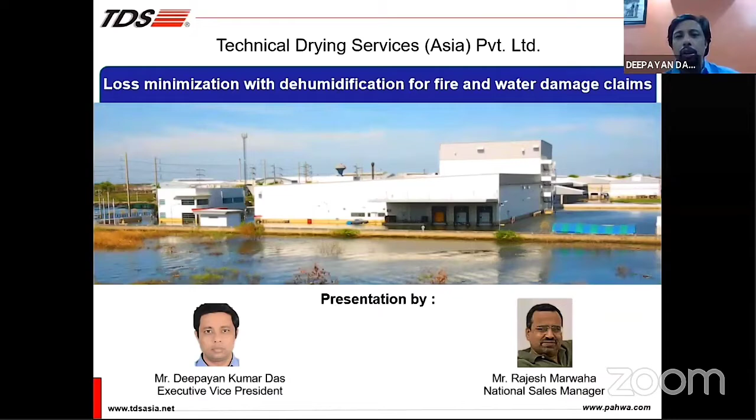So with this, let me start the presentation. Today, our presentation is going to cover the following things: an introduction of the Pahwa Group. We'll talk about what is water damage restoration, its impact, basic types of damages, so on and so forth. We'll also dwell a bit on the science of drying.

What is restoration drying? Advantages of restoration drying. What can be restored? What cannot be restored? Some case studies, question and answers. And finally, we'll talk about TDS, Technical Drying Services, own credentials in being in this field.

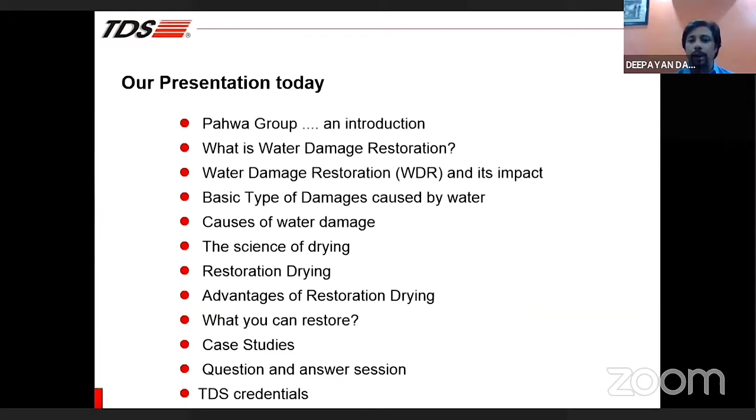So to start with, the Pahwa Group is basically almost a 55-year-old company operating out of India. We have got four companies.

Dry-Air is one of the companies, DRI, Delair, Technical Drying Services, and we also have another company in Switzerland called Dry-Air Prokon. So three of our businesses, Dry-Air, DRI, Delair, are manufacturing, and TDS is the marketing and services company.

We have a worldwide network covering India, Malaysia, China, Switzerland, Brazil, Philippines, Korea, Bangladesh, UAE, Nigeria, and the USA. These are locations where we have our own offices and factories as well.

We have 11 manufacturing plants, 7 in India, 1 in Malaysia, 1 in China, Switzerland, Brazil. And when you talk about our resources, we are more than 1,500 plus employees, out of which almost more than 50% are either engineers or technicians.

We have a very strong backbone of research and development facilities, which is registered and recognized by the Ministry of Science and Technology, with 8 in-house research and development and test labs.

We are proud to say that, as an Indian company, we have filed 123 international patent applications till date, covering 13 different new technologies, out of which 43 patents have already been granted or allowed.

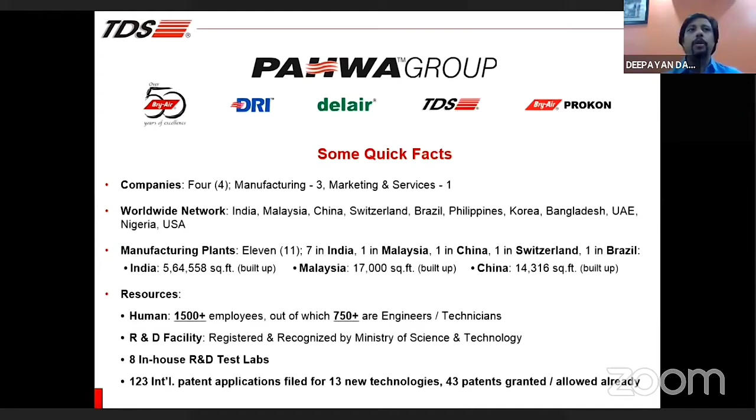Now we start with the presentation, and the first question that we would like to dwell upon is, what is water damage restoration? Now this is something which is very relevant today. And why it has become more relevant in the recent years is something which we'll see shortly.

But let us understand, what exactly is water damage restoration. Now, water damage restoration, let us first understand, is an emergency service.

Like you have got a fire service, which is an emergency service. A medical team is required on an emergency basis. Similarly, a water damage restoration team is also an emergency service.

Basically, the objective is to dry and restore assets that are damaged by water. So we say that our objective is to preserve, protect, and secure the assets from any further damage, and to recover and restore the material to its original functionality.

Now we say we want to recover and restore the material to its original functionality. That does not mean that all the materials we restore, all the equipments or components that we restore, will become like the original in terms of look and feel as well.

So our objective entirely is to first of all work on the functionality of the asset, and to ensure that the asset owner is able to derive the necessary functionality from the asset.

Now you would notice here that we are talking about preserving, protecting, and securing before recover and restore. That is because as you go on through the presentation, you would realize that water damage is something where we

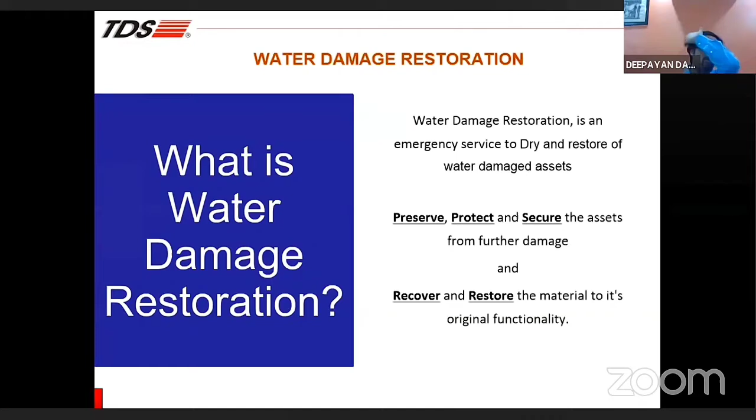Now, why is water damage restoration so important? Water damage restoration is so important because it is one of the chief causes of loss that occurs in a country which is related to natural disaster.

Just to give you some statistics, 2005 Mumbai floods, almost about 3,000 crore of loss was reported. 2008 Bihar floods, almost 2,000 crore of loss was reported.

And when you talk about the latest one, which happened in Kerala in the year 2018, we are looking at a loss of something close to about 40,000 crore, which was reported. If we look into the situation worldwide, we will see that the damage is much bigger.

For example, if you see 2017 Hurricane Harvey, which hit Texas and Louisiana, the loss reported was something close to about $90 billion US. Hurricane Maria, which hit in 2017, the loss reported was $102 billion.

Now, most of this loss has to do with water, which comes in and damages households, damages industries, damages office equipment, vehicles are damaged, raw materials are damaged, finished goods are damaged, so the loss becomes huge.

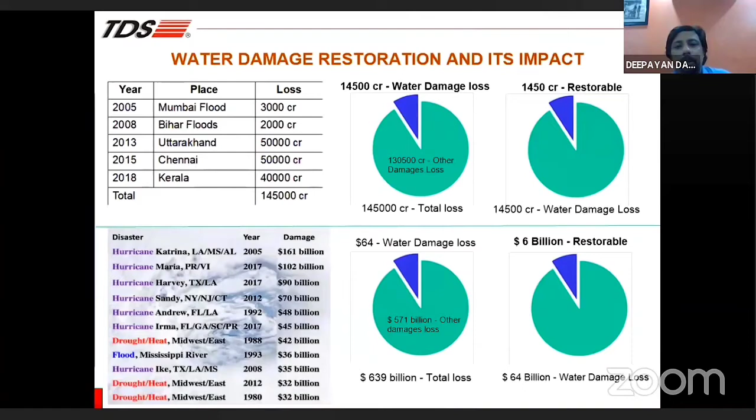Now, water-related damages. If we look into water-related damages, we can actually classify them into three clear categories. As we all know, if there is a damage which is happening, it is very essential that water must have come inside. So one type of damage is called the clean water damage.

Now what is a clean water damage? This is typically a pipe bursting, overflowing from sinks, which can happen at our home. There can be rainwater which enters, or it can even be a fire incident wherein the fire engine must have come and doused the flames with clean water. Now the point to be noted about clean water damage is that it only wets the surface. It does not cause much more damage than that of wetting the surface.

But if a clean water damage is not taken care of within 24 hours, it can actually turn into the next stage, which is called a gray water damage. A gray water damage typically happens when there is an equipment discharge, or some kind of chemical discharge, or rainwater moving through unclean sources. These are typically more dangerous than clean water damage because they increase the rate of corrosion significantly.

They cause a lot of other damages in the system. They are a potential for infection. They can cause other kinds of contamination, so on and so forth. We also have to understand that if a clean water damage is not restored within 24 hours, or we do not start working on it within 24 hours, the water will start becoming gray water, and the damages would be something what you would expect in a gray water damage.

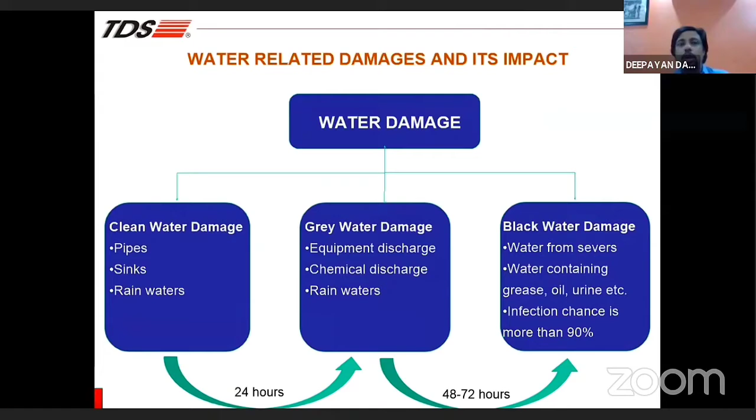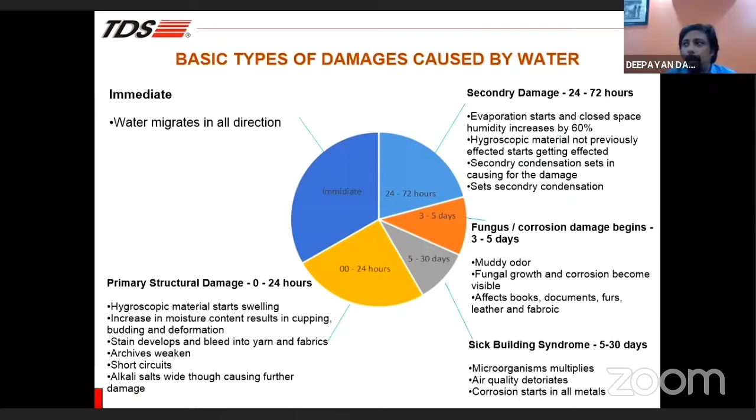Now when you talk about the damages caused due to water, we see that, as I told you earlier, we are fighting against time. And what we have tried to do here is give you an idea of how water damage actually proceeds through an area which has been damaged. Now when you look into the causes of water damage, there can be many. One is heavy rainfall, hurricanes, or floods, which are typically natural damages.

Broken water pipes inside the building, basically plumbing faults, are the second biggest cause of water damage. Fire control procedures, which involve substantial quantities of water during firefighting, also cause damage.

The problem with firefighting is that whatever damage the fire causes, the water sprayed to control the fire causes much bigger damage. So there are cases where the shop, godown, or building that caught fire has damage from the fire, but places around it also get damaged because of the huge amount of water. For those affected by the water, it's secondary damage. They want to get their facility back into action quickly, but because of the secondary damage, they also tend to incur business losses compared to the ones affected by the fire itself.

Defective and damaged sprinklers in commercial buildings are one more problem area, mainly with offices. Today, when you look at call centers and business processing centers, this can be a big challenge because it can put them out of business for a significant amount of time. So let's say a call center goes out of business for 3 hours in a day because of a water sprinkler - that's a significant loss in terms of the revenue they can generate.

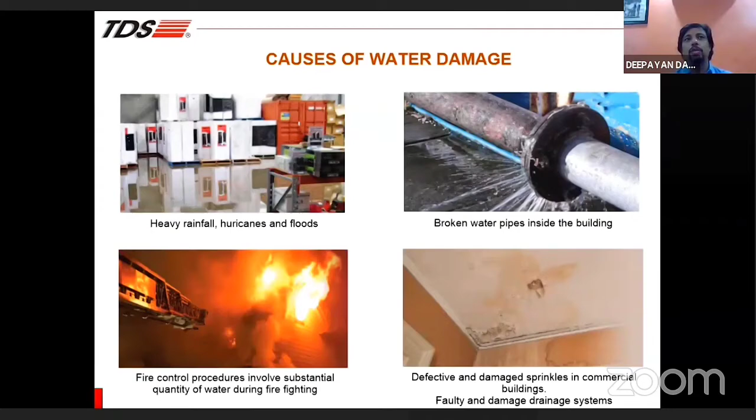Now, to go further, we have to understand drying. We all know drying - we wash our clothes, we dry our hair, we mop our floor and it gets dried. But not everybody thinks about what exactly is happening, or the mechanism happening in the drying process. The drying process is a technology. Although we may not easily understand it, it's a technology.

The definition of drying is a mass transfer process consisting of removal of water or any other solvent by evaporation from a solid, semi-solid, or liquid. So whenever you encounter the word drying, you have to understand that this is a physiochemical process happening, with strong technology behind it.

Basically what we are talking about is that there is moisture and there is a heat transfer happening. As a result of the heat transfer, the moisture is forced out of the system, and then we have a gas, and this gas is responsible for moving the moisture from the area.

The yellow colored lines that you see are the moisture, and the blue line is the dry air. As the dry air comes in, it pushes out the water molecules. If we do not maintain a particular velocity of the gas, the water molecules will start saturating, and then no more drying happens. So you need to give a velocity of air to move out the water molecules.

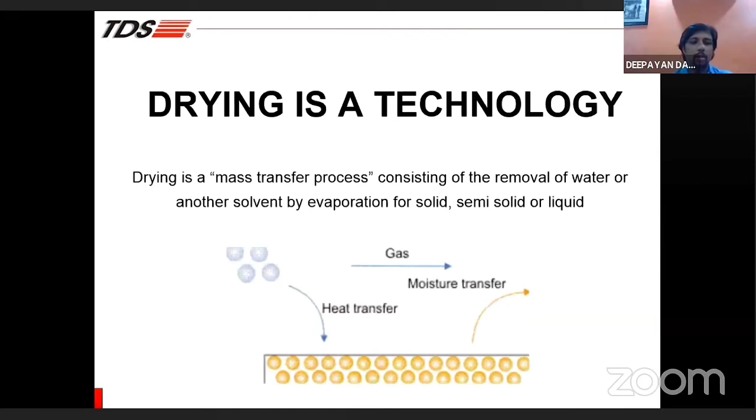It's also important for us to understand that if we want to understand dryness, we have to understand moisture. For our discussion today, it would suffice to understand that there are two types of moisture: surface moisture and core moisture. Surface moisture can be more easily managed by blowing the right quantity of air at the right temperature. Whereas core moisture requires very specialized equipment like dryers and dehumidifiers to take out.

Whenever you are encountering a water damage, you would encounter both surface moisture as well as core moisture. Surface moisture is still easier to manage.

Maybe what most people do is, the moment a water inundation has happened, the first person they would call, apart from the surveyor, would be the housekeeping guys. They would say, look, there's a lot of water which has come in, clean it up. Now the housekeeping guys have no idea what kind of moisture it is, whether surface moisture or core moisture. They will come with their own set of expertise and try to wipe the surface clean.

In the process of wiping the surface clean, what they do most of the time is ignore those areas which are susceptible to core moisture. So they might do a good job mopping the floor, and when you look at it, you find that most of the water is gone. But in the crevices, inside the woods, the wooden panels, fabrics, yarns, this water has already seeped in. Inside the walls, this water has already seeped in. And this problem is going to start impacting you after a few days.

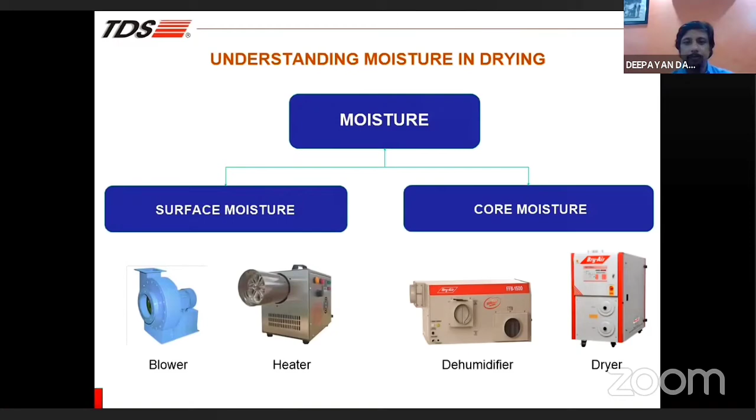Now, what are the factors affecting the drying process? These are some of the terms which we use very frequently: dew point, relative humidity, air temperature, air velocity, vapor pressure of water, time of contact, saturation level, type of material. So these are very important for us.

These are technical terms, but when you have an expert like TDS, our people are very well conversant with all of this. We understand the impact of all of this on the drying process, and we are able to take the necessary steps.

Let's give you an example. If I have core moisture in a hygroscopic material, TDS people would know, the moment they enter a room, what are the possible hygroscopic materials present. And in a hygroscopic material, we also know that we will have to create a vapor pressure differential if we are to dry it. Just blowing hot air is not enough. On the surface it might look dried, but the damage is being done inside. We need to pull that moisture out from the core if we are to protect that particular asset.

This is something a normal cleaning or housekeeping person will not understand, because we understand the science behind it. We train our people in psychrometry, we train our people in the dehumidification process, so our people are able to understand it.

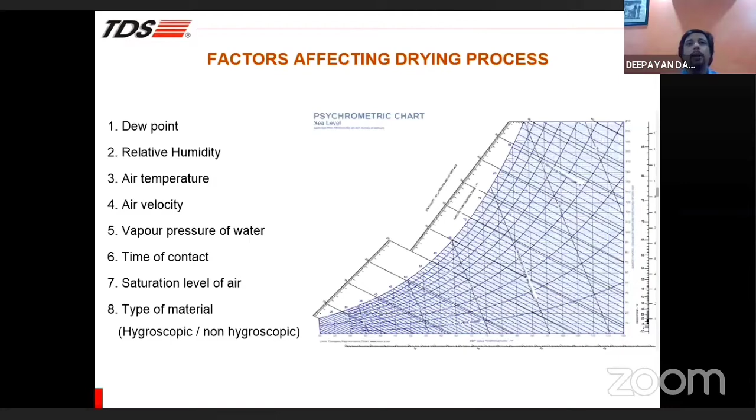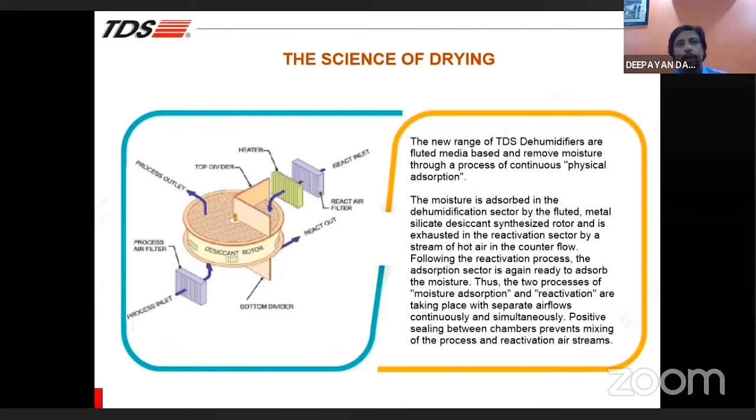The science of drying — this is how TDS does it. The moisture is adsorbed in the dehumidification sector of the fluted material. So we have our own machines, our own technique of drying when we encounter a site that has been inundated or affected by water damage.

As I had already shared with you, this is a bit more detailed on water damage and its 5 stages. So basically, primary damage is the free flow of water, the wicking of moisture into the material is the secondary damage, and tertiary damage is the high humidity damage with active microbial growth. I think we've talked about this in detail during the initial part of the discussion.

I won't spend more time on this, but it reiterates the fact that in a drying project we are racing against time, and we have to understand a lot of things beyond just the fact that water has come in.

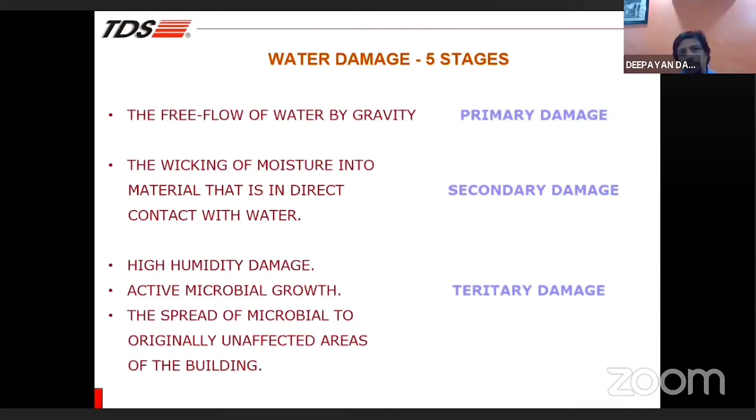Key concepts we need to keep in mind: quantify and understand the moisture in the material, whether it is hygroscopic or non-hygroscopic, how much moisture it can absorb, whether we need to pull out core moisture or whether surface moisture management can help, and control key variables at the surface — air moisture, air movement, and air temperature.

Most professionals from TDS would understand that it's not only about putting in hot air or running a blower to dry the whole place. We need to manage the moisture in the air, the movement, the direction of the movement, and the temperature.

For example, let's say you call us in to dry a room, and we find the relative humidity outside is close to 85-90%. Maybe there is no core moisture, only surface moisture. But I understand that if I pull in air at 85% relative humidity to dry this room, I would actually be increasing the humidity inside the room. As a result, the evaporation rate would go down, and the water would take much longer to dry out than under other circumstances. So I would probably use a different technique to dry it rather than just running a blower, as an example.

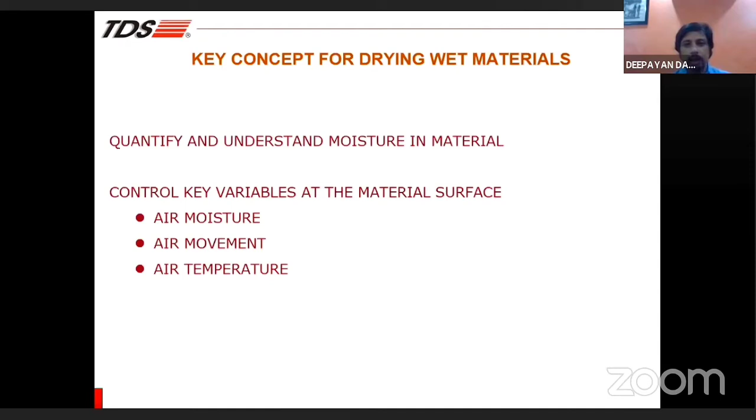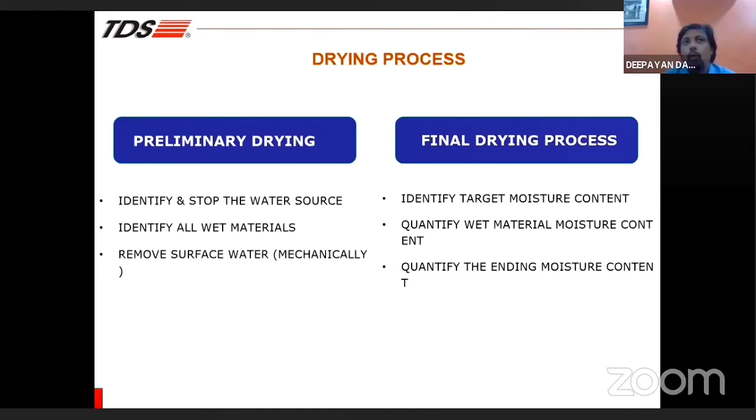In the drying process, we do two things. First, we do the preliminary drying: identify and stop the source of water, identify all the wet materials, and remove the surface water mechanically. Then we enter the final drying process, where we identify the target moisture content, quantify the wet material's moisture content, and quantify the end moisture content. As a result, what you get is a functionally fit material.

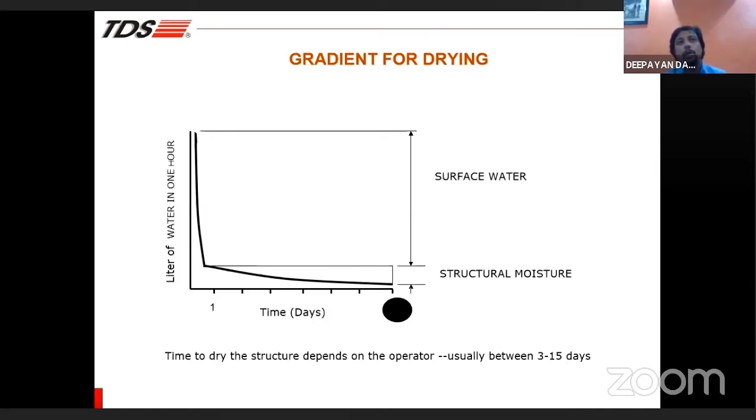With our processes and systems, we can reduce this time of 3 to 15 days significantly, and thereby protect a lot of the assets which otherwise would have become vulnerable.

Apart from this, we look into material characteristics. We have a huge library of materials. We understand their nature of hygroscopicity, their propensity to absorb moisture. If moisture is absorbed, how long does the material take to give it up? At what temperature does it give up the moisture? What kind of vapor pressure differential is required to pull the moisture out of the system?

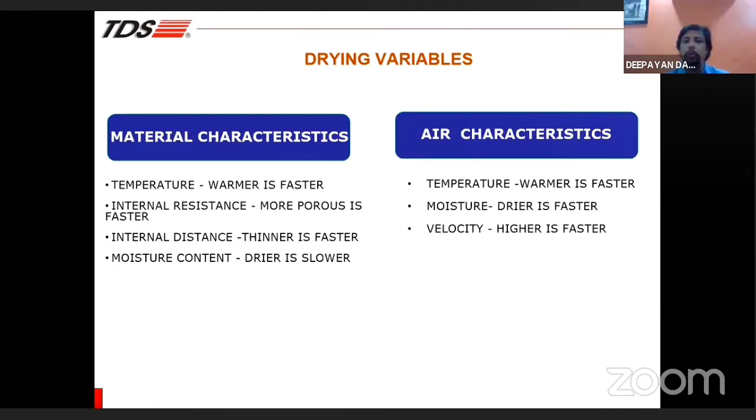This is what you get as a package, or this is something extremely important to understand if we want to understand the drying process. Similarly, air characteristics - the temperature of the air, the moisture level of the air, the velocity of the air - all these things will play a very strong role in defining how we approach the drying problem.

Restorative drying is basically defined as removing abnormal moisture from the affected material, usually contents or components of the structure, and returning them to their former normal state. So this is what restorative drying does.

Restorative drying, mind you, is not limited only to structure. It can be done on machines, raw materials, finished goods, documents, works of art, carpets. Just think about it - restorative drying has a huge area of application.

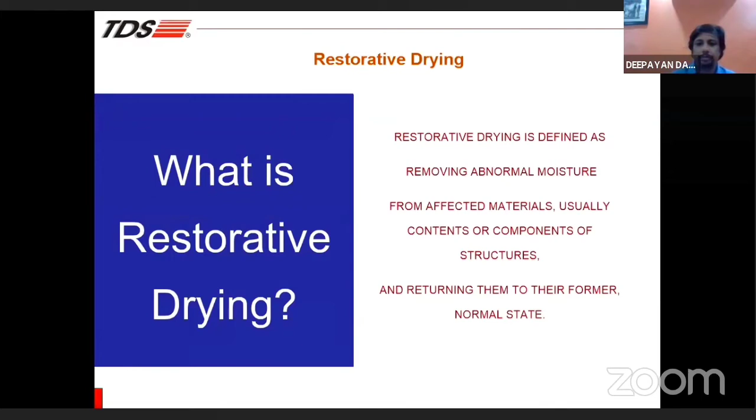The advantages you get with restorative drying: it minimizes the loss. It can save almost 40 to 80% of reconstruction and replacement value. It reduces interruption of business and production activities due to shifting and reconstruction.

Just to give you an example, last year we had huge rain in Gurgaon, somewhere in the month of August, and one of the companies here was a Japanese company called JTEKT, basically a bearing manufacturing company, and their control room, which was in the basement, got inundated with water.

Now they called us. Our team went to the site, looked at it. When our team actually went into the site, we had almost ankle deep water in the factory. We looked into it, understood the problem, and told them what preliminary support was required.

So we asked them to start their pumps so that the liquid water which was accumulated could be thrown out. And at around 11:30 in the night, they issued a mobilization order for us.

By 1 o'clock, our team was on site. Our machines were up and running, and the result was within 2 days, in fact 1.5 days, they were back on track. Otherwise, they would have taken a much longer time to get back and start operations.

So this is what we do - we can help customers come back on track much quicker than otherwise they would have. It reduces the damage and compensation expenses incurred by the insurer. So that is a direct benefit to you.

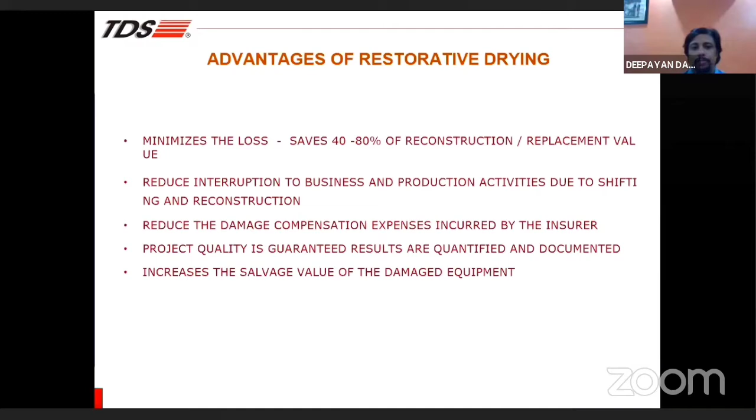Water damage restoration impacts all types of stakeholders in the industry - it impacts the insurance industry, it impacts individuals, it impacts administration and the nation, and it impacts business. For the insurance industry, it's unbudgeted compensation expenses and profitability issues.

For individuals, it is direct damage to their property or assets - they incur reconstruction expenses. For administration, basically the country, it causes a hold up in economic activity, and funds need to be allocated for reconstruction. For businesses, it's loss in assets, loss to infrastructure, business interruption, and a huge cost in terms of replacement expenses. So timely water damage restoration can actually help or support everybody who is connected to or impacted by these losses.

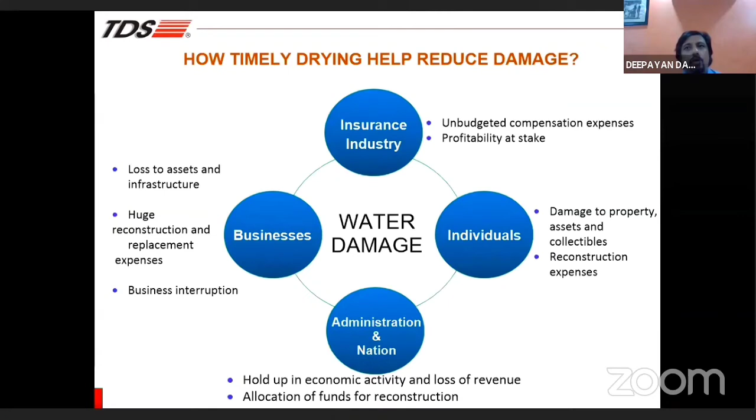So what do we do under the restoration process? The job is immediately attended to. We get a call from either a surveyor or an insurance company. Usually, almost 99% of the cases, it is the insurance surveyor who calls us at site.

The assessment is immediately done by our trained people. The reason for the water damage is determined. A restoration repair report is prepared, and it is submitted to the client or the insurance company, whoever has called us.

Further advice for segregation of wet and dry material is communicated. Damaged items are identified and advice for restoration is given. A plan of action is decided and is included in the report.

After that, when you call us, we will go in with our equipment and machines and begin the final drying process. So a question definitely comes in: what is it that we can dry?

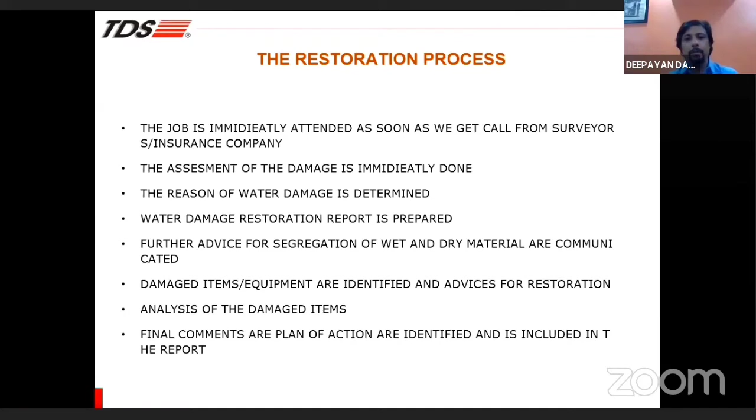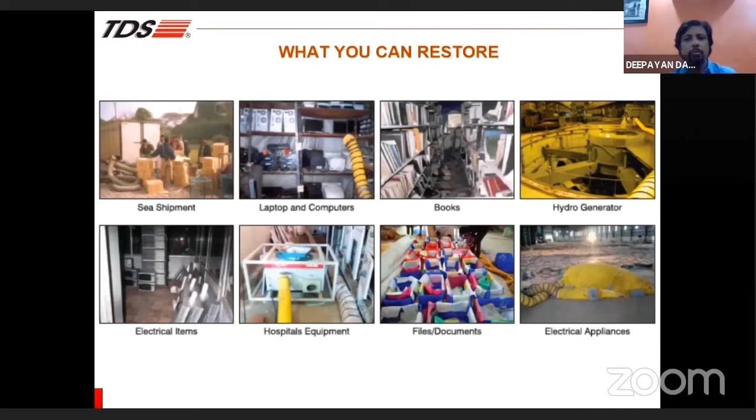Anything - sea shipments, laptop computers, books, documents, electronic equipment, hospital equipment. So you name it and it can be dried.

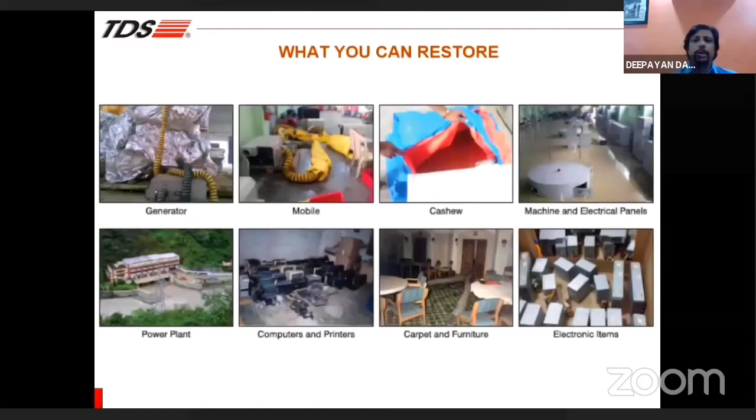The customer accepted this material, and they issued an appreciation letter. We will also share that after these slides.

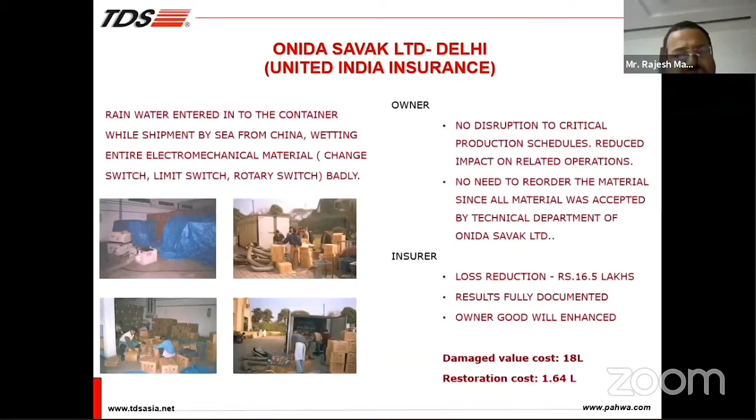With these machines, dehumidifiers, you can even measure the relative humidity of the air going from the outlet of the machine, which easily shows what relative humidity we are measuring in the room. We are also creating that type of air which will basically suck the moisture out of the wet material.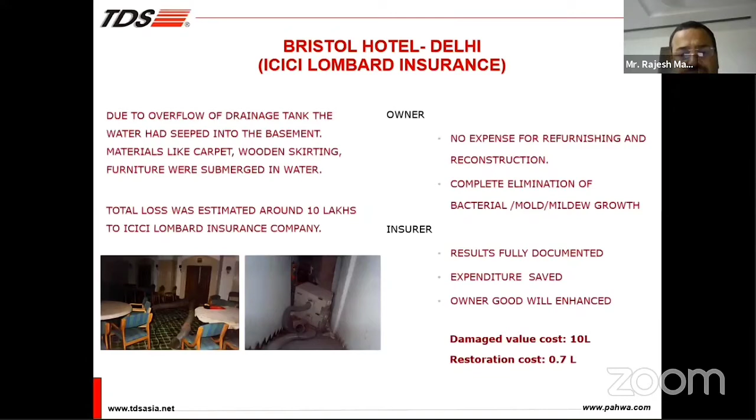That is Redington Tata AIG. We had one at Bombay, due to fire, the material was wet. It was a godown which was consisting of computers, laptops, PCUs, a lot of electronic equipment.

The godown was submerged with water, around 45% water damage. Equipment could be saved. The rest of the goods were salvaged by selling them in the market.

But the total value was around 1.5 crores. We charged approximately 2.9 lakhs for the customer. The customers are very happy with this service also.

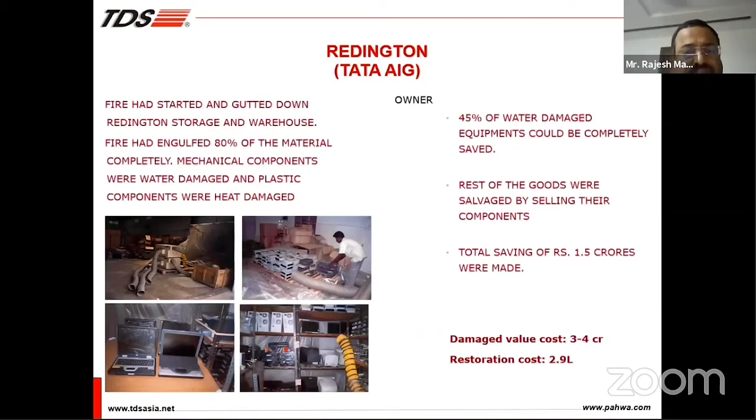Now, this is one typical job we did in 2005. We will not forget this job because the Government of India was directly involved. This is one library in Panvel, containing archives for the Institute of Geomagnetism, with a lot of important documents which were wet due to water damage.

We dried about 95% of the archives, and the value of the material was priceless. We dried about 5,000 books of research work, and we charged approximately 2 lakhs from them, and they were quite happy.

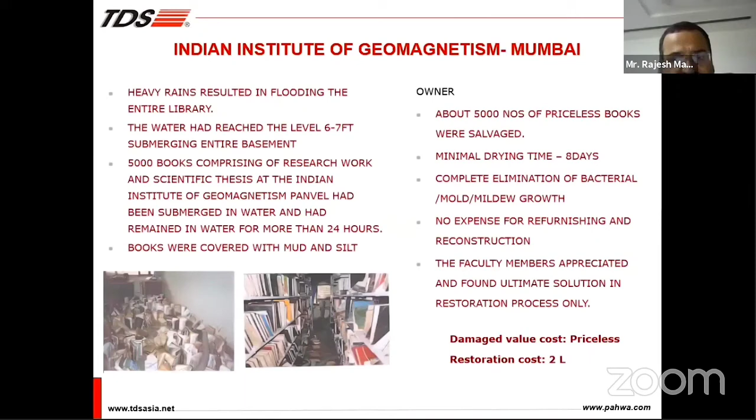I think the Ministry of Science was directly involved in this job. And for the first time, Air India took our machines to Bombay - they managed to take the machines on their flight itself.

And this is Haier Appliances Bombay. Again, we dried the equipment - laptops, PCUs, fridges, and all these white goods. The cost of the damage to the equipment was 6 to 8 crores. The restoration cost was approximately 7 lakhs.

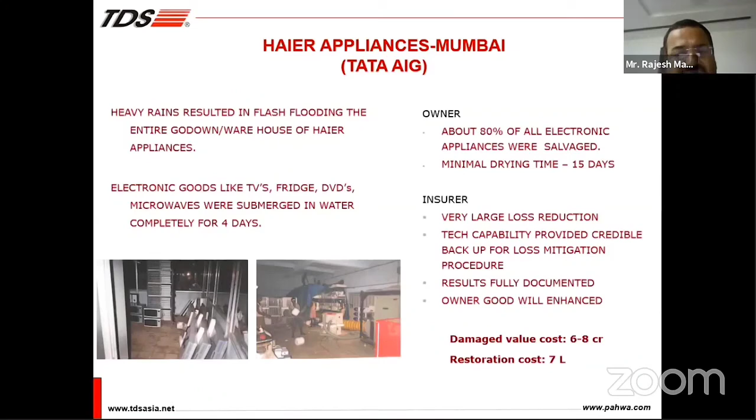This is one of the major jobs we have done at Satluj Jal Vidyut Nigam Limited at Jhakri, due to water that had come inside the hydro project, where the whole power plant was underwater. After removing the water, we dried the generators, panels, and a lot of other equipment. There have been at least 7 to 8 cases in India of major disasters at hydro projects which we have successfully dried, naming Tehri, Koteshwar, Satluj Vidyut Nigam, Koteshwar, Dulhasti, Kullu, and Chutak, one of the major projects owned by NHPC, where we have done similar jobs.

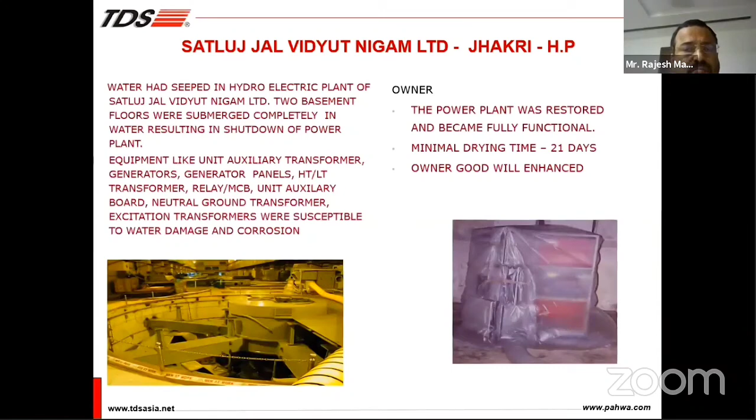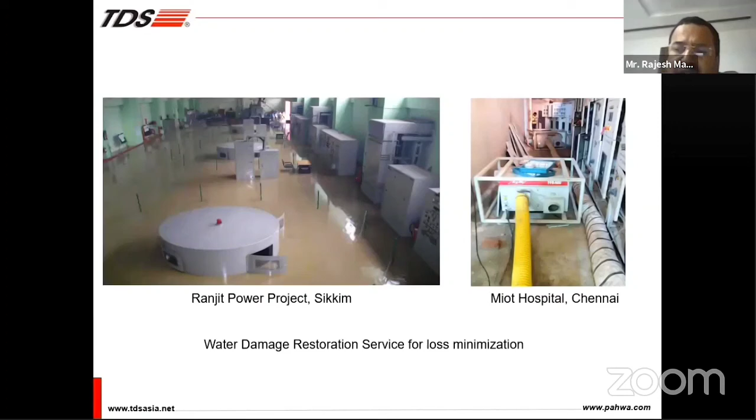And here are photographs of the recent jobs. This is for Ranjit Power and Bajaj Appliances. This is for the Cochin job, where we dried the equipment. Initially, the salvage buyers were not accepting the material and were giving less value, but after our drying process, the value increased and they got a good price.

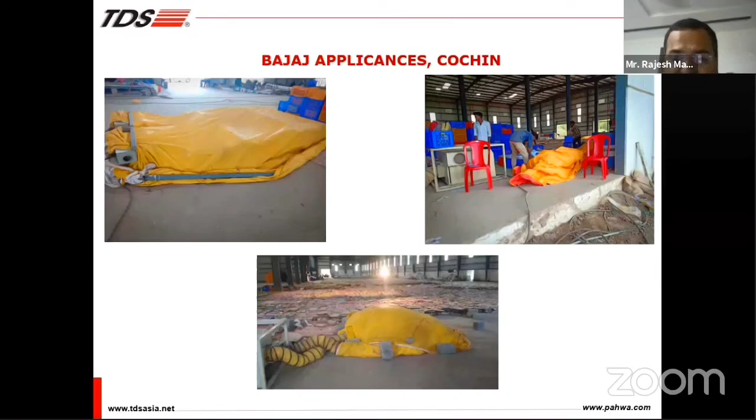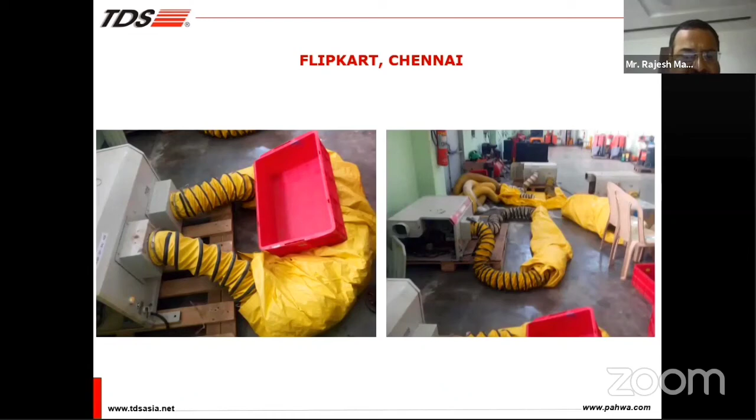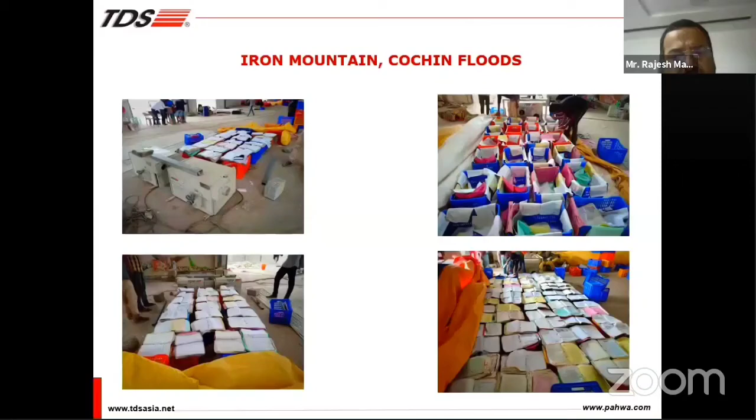This is for Iron Mountain, a company storing documents in Cochin for various companies. These are documents of some agreements which we have dried. This job we did for at least 30-35 days initially, and after that it was extended, and we were able to save a lot of files and documents for Iron Mountain.

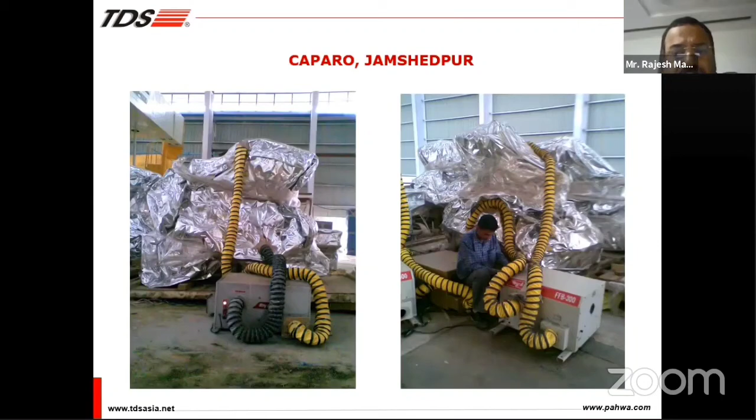This is a job for Caparo Jamshedpur. You can see the procedure, covering the robotics material with tarpaulin sheets. The dehumidifier takes air from the inlet of the enclosed area and passes it through on recirculation, drying the systems. We dried at least 19 robotics for this job. The end customer was Tata, and they were very satisfied, releasing an appreciation letter to us. This is the appreciation letter. We did this job in 2008.

After that, we also did a job for Caparo Engineering in Calcutta, that job was from ABB. And here are the references.

We have done South Indian Bank, restoring the ATMs. Alstom, the metro project at Cochin. Central Bank in Cochin, through Cunningham Lindsey. EV Plast, with blowers and other items. Ganesh Bendoplast, boxes, and Godrej Consumer Products. Havells India, for Nirmana, then ICICI Lombard, various types of jobs. Iron Mountain Storing, JC Gupta Isla, a job in Bombay for automobile parts which had corrosion from another agency's work, which we also removed. Then SK Das, SCAD Surveyors, Puri Crawford, Pro Connect Supply Chain Solutions, Premier Taj Association, ONGC, where there was also a fire, jobs in Dahej, Microbial Silica where we supplied equipment and dried it, Innovative Technologies, Mac Trading, MNR Associates, Linde India, Krishna Maruti, Kamal. There are a lot of customers where we have dried the equipment.

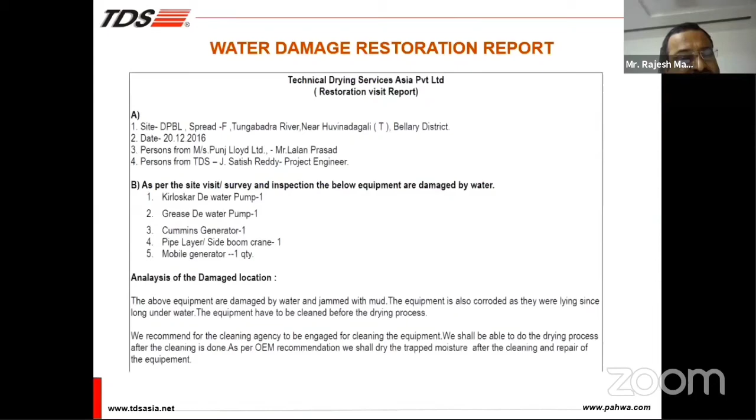This is one case study, a very typical job based near Hyderabad. What happened was these Cummins generators, side boomers, and mobile generators were damaged with muddy water.

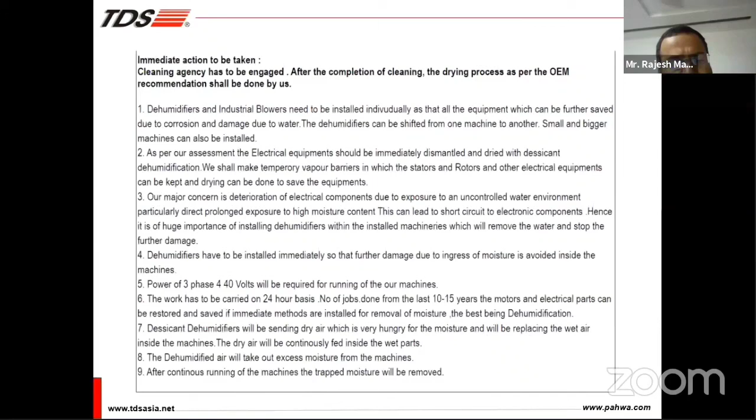Initially, when we went to the site, we made our assessment and told the customer the equipment was totally damaged and it cannot be done. Because the water was very muddy, we told them it cannot be done, and we submitted our report to the customer.

But the surveyor was after us to do the job. Then we had one idea: we installed water jetting machines, and with the help of these jet machines, we removed the mud from the water.

After removing the water, we asked the customer to call the OEM people, and they were quite satisfied. It was a job we got after 2 months, but they were able to repair everything, and the restoration was done, and the customers were quite happy. Sometimes we are also afraid a job cannot be done, but the surveyor kindly pushes us to do it, because it's high value, and if you do it, a lot of saving happens for the industry, the insurance surveyor, and the insurance company.

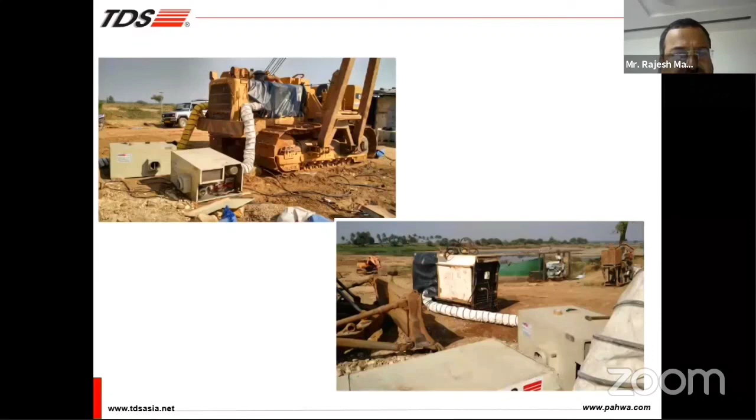About TDS, we have 7 branches and around 100 plus employees. In our 7 branches we have sales engineers, our project team, technicians, godowns, and machines are always there.

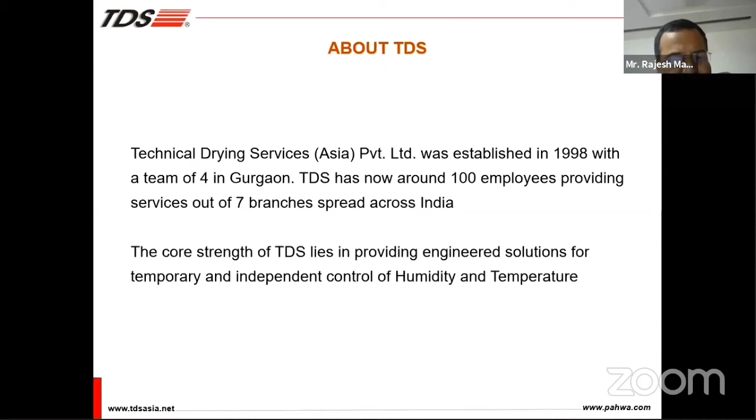Whenever we get a call from the surveyor, our team immediately visits the site and gives a report in writing to the customer and surveyor. After meeting with the surveyor and insurance company, the customer takes a decision, and after meeting with all three of them, we get the order and execute the job. Once the job is finished, our equipment is demobilized.

Now we have 3 major divisions. One is Industrial Project Solutions, where we basically dry the equipment. We are also restoring the equipment, meaning we are preserving it.

Some sites get delayed. One typical site is NHPC Subansiri, a hold-preserve site with electromechanical equipment of Alstom lying there for the last 6 years. We have preserved that equipment in a controlled environment. The surveyor there is KD Kohli, and twice I have traveled to that site with him, because the equipment value is very high and the material is insured, requiring preservation.

There may be several power projects, maybe in Bihar or Odisha, in flood-affected areas, where equipment project jobs are going on and the material may be insured. If you require services there, the equipment can also be preserved so that further damage due to water does not happen. This is one division where we can preserve equipment as per the customer's requirement.

Then surface preparation and coating, where we do blasting and control humidity during the blasting and painting jobs. Then water damage restoration, which we already explained. Then comfortable working conditions in confined areas, wherever people get suffocated or cannot work, we provide temperature control and ventilation as per customer requirement.

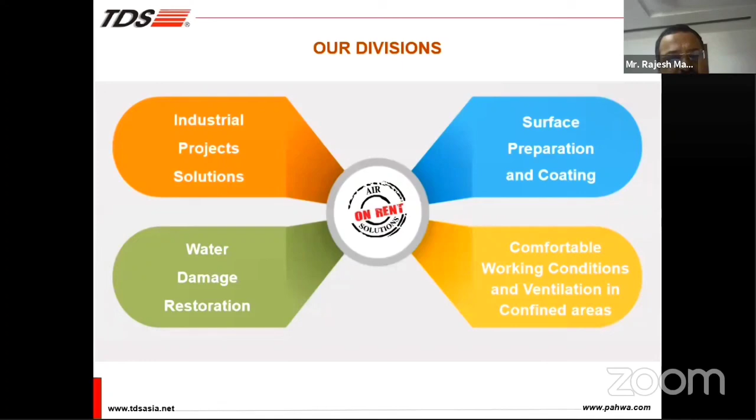At one site in Bombay there was a fire in a company, and the company, and also the insurance company Cholamandalam, told us to control the humidity in the whole building, because the fire happened on the second floor and the fire department came. The whole building was wet, all the floors were wet, and their equipment and machinery were wet.

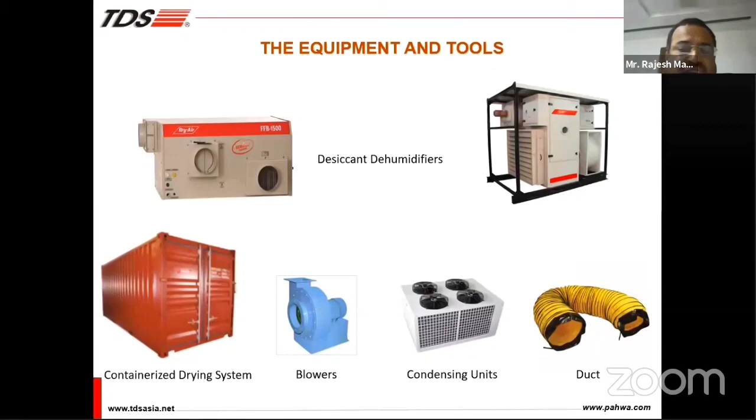After drying, the customer told us to control the humidity for the machines, because since there was a fire, the fire department did not give them a certificate to start the building. So they wanted to preserve the equipment in a controlled environment across all floors. We can do that with a combination of air conditioning and dehumidifiers as per the customer's requirement. If the machines require 40 to 45% humidity control for a huge building, we can do that too with our system, combining various systems as needed.

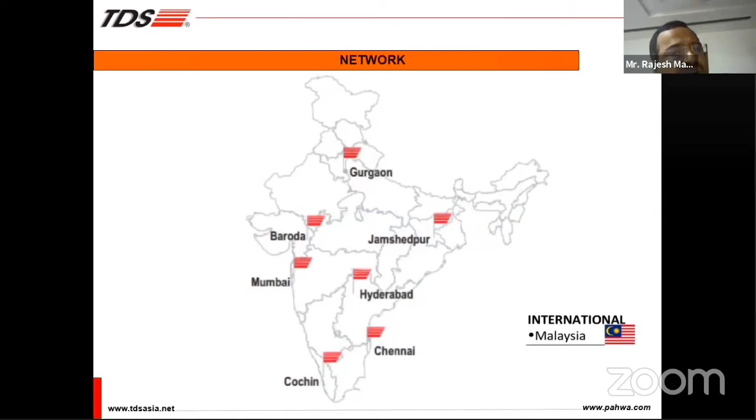We have our offices in Gurgaon as head office, then Baroda, Jamshedpur, Bombay, Hyderabad, Chennai, and Cochin. And we have godowns at Gurgaon, Baroda, Jamshedpur, Bombay, and Hyderabad, and we are fully equipped with a lot of equipment.